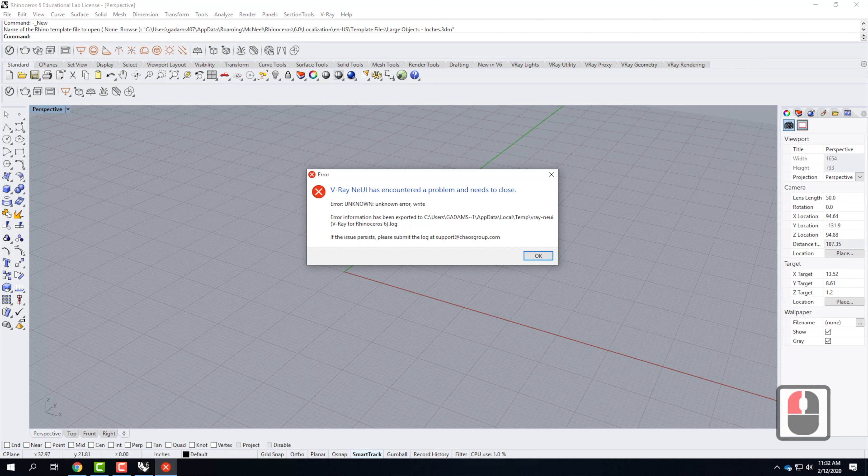Interesting. Well, it's a good thing we're not using V-Ray today. By the way, the computers have been acting up all day. So if your computer acts up, I apologize, but that's the way it's been.

So I am in inches, so we can go ahead and start working. And what I'm going to start with is drawing the shape that you see in part 1, step 1 right here, which is essentially a 2-inch radius curve, a 13-inch straight section, and another 2-inch radius curve. And so as I start to draw that, I'll go ahead and start with the curve tool. And this is one of those things where we have a lot of flexibility in terms of how we create this. I'm just going to start with the basic arc, center, start, and end.

And when I do that, the center of the arc, I'm going to go ahead and move it over 2 inches. So the center in coordinates, if I was starting right here at the origin, would be 2, 0. I didn't put an @ sign in it, just 2, 0. That would get me started. And then the origin here would be 0, 0. That would be the start of my arc. And the end of my arc, I just need it to be 90 degrees. So I can go ahead and turn on my ortho here.

And it's going to be right there. And so that creates that first little bit of the arc. You could create it in a different way. You could create the line first and then work from the line. I mean, there's lots of flexibility here in terms of how you actually create it.

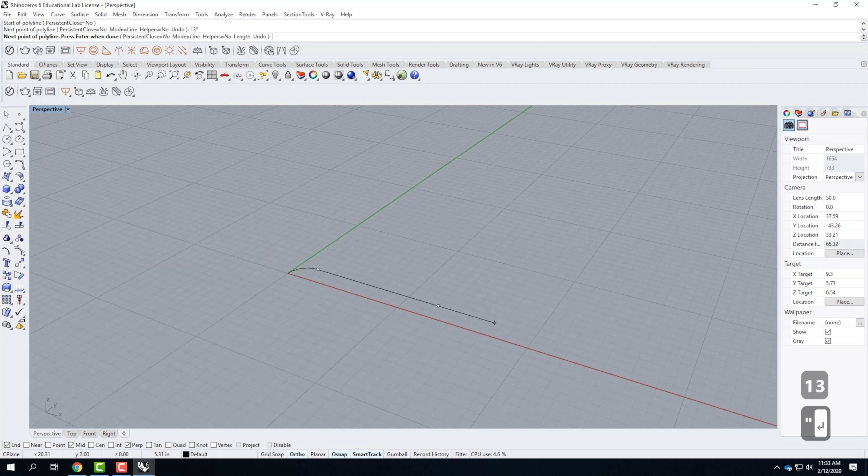Next thing I need is a polyline. And I'll start by snapping to this endpoint. Currently my snaps are not on, so I'll go ahead and turn on my end, mid, and perpendicular snaps. Those are the 3 that I like to have on as I work. And I'll snap right to that corner, and I'll draw over by 13 inches. So it's just the length here. There's my 13 inches, and I can go ahead and finish by pressing enter again.

Now I need this arc over here. I could do the same thing. I could mirror this arc, but I could also just create the arc again. So there's the start and the center. So in this, I would want to come down 2 inches to get that center. We'll start right there, and we'll end right there. And that gives me that piece of the arc as well. So I have this piece, and this piece.

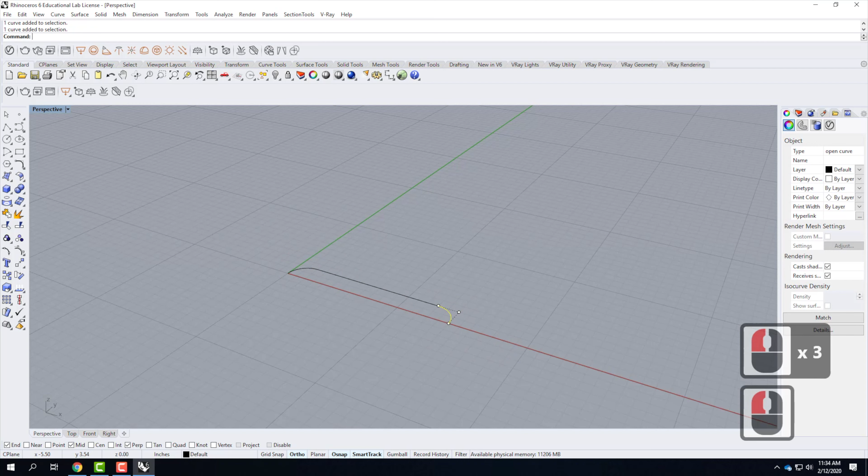I'd like all of those to become one continuous curve, and I'll do that by selecting them, and then going up to Edit, and then Join. So that makes them one continuous curve, and of course the middle here disappeared because of that error in Rhino that I haven't changed yet. So let me go to Tools, and then Options, scroll all the way down to View, expand that, click on OpenGL, and uncheck that GPU tessellation option. And there we go. Now I can see my object.

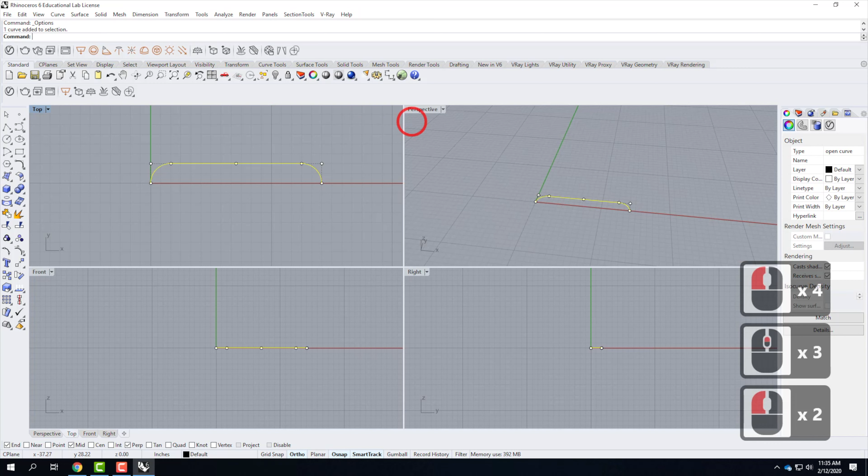Okay, so I have a continuous line that starts with this arc, goes straight, and then comes back here. But I'd like it to be standing up in the third dimension. So it's currently flat on the ground. I drew it flat. You could confirm that by looking at it in the top view. Yep, there it is. So I want it to be three-dimensional. I want it to be standing up. So I'll use my rotate 3D command. We've done this before. I'll go up to my transform. I'll choose rotate 3D. Alternatively, I could type rotate 3D into the command line.

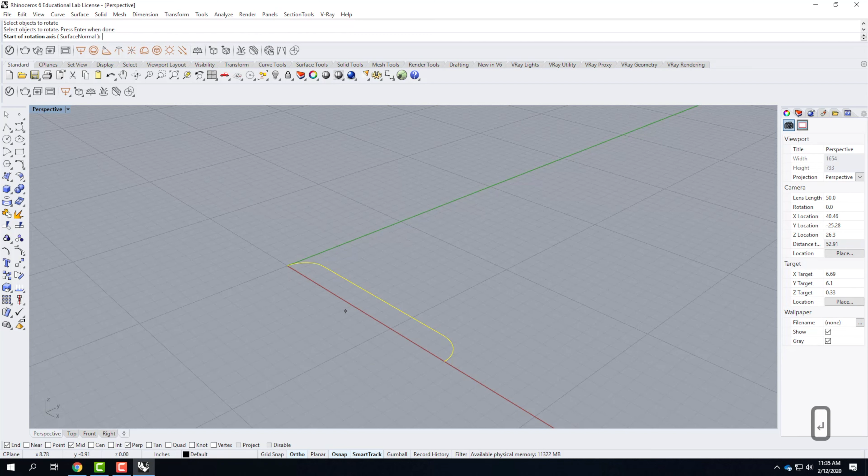I'll choose my curve and press enter. And then the start of the rotation axis, that is this axis right here, because I want these 2 points to be down on the ground. So I'll snap to this first point, snap to the second point. That's my rotation axis. My reference is going to be going up the y-axis here. And then I'm just going to fold it up till it's standing at perfect 90 degrees.

Remember, if I didn't have ortho turned on, I could hold down Shift on the keyboard and get it to line up perfectly vertical, like that. So all I've done is I've taken that curve that I drew, and I've now made it so that it's standing up, like that.

So the next piece of this is to go ahead and draw a circle that is right here where we start. So I'm going to come over to my tools here, and I'm going to choose circle. Now in this option, it's asking for the center of the circle, so I would pick the center of the circle there. The next thing here is that it's asking me for the radius of the circle. Well, the little picture that's hard to read here shows a diameter of 0.5. So a diameter of a ½ inch, which would mean the radius is 0.25. So I'd type in 0.25 and press enter, and that would give me a circle with a diameter of a ½ inch or a radius of a ¼ inch.

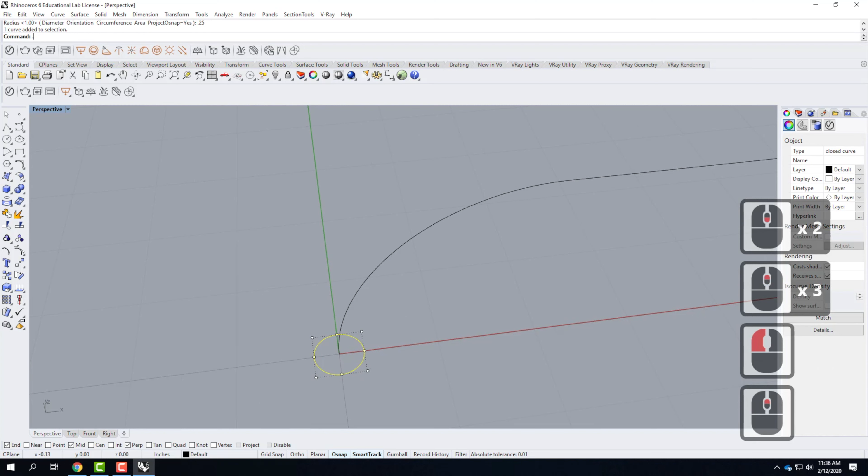Alternatively, when you're creating that circle, you could switch to diameter mode and type in 0.5, since you know that it's the diameter of 0.5. So pay attention on this exercise as to whether I'm telling you what the diameter is or what the radius is, so that these little pieces aren't too big.

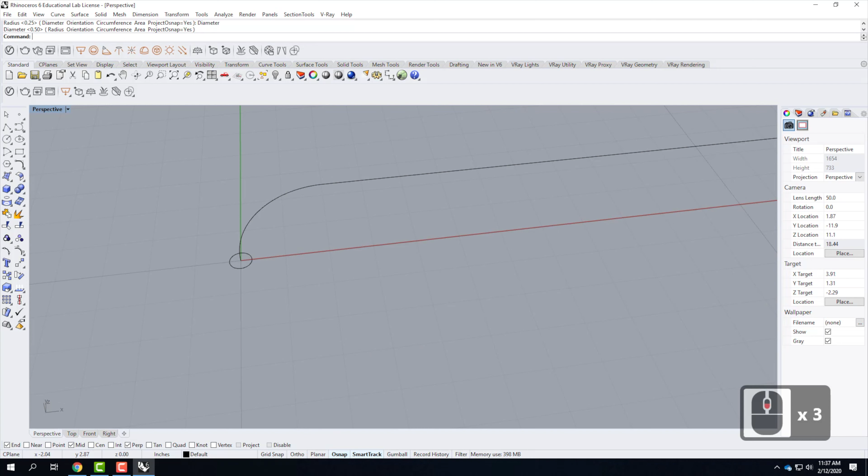Okay, so what I have now is I have something that's a curve, and I have something that defines the cross-section of an ultimate shape. So I'm going to use a command called a sweep. And what a sweep does is it takes a curve, so in this case, this curve here, and it calls that a rail. You could think of it like a railroad track. You have a train running on a railroad track, and there's a rail on one side. That train's going to stay on the track, and it's just going to keep following it. So what we're doing here is we're saying, I want this curve to follow this rail and give me a surface as it follows along.

So it's kind of like the Follow Me tool in SketchUp, if you've worked with that before, though it works a whole lot better. So what I'm going to do is go up to my Surface menu and choose Sweep 1 Rail. Alternatively, I could type in Sweep1, and the first thing it asks me is to select the rail.

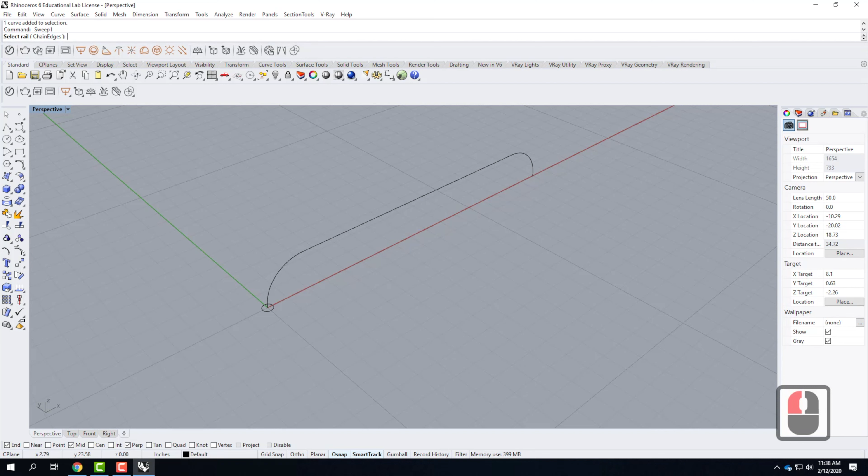So the rail in this case is this curve right here. I don't have to press Enter because I'm only selecting one curve. Then it asks me to select the cross-section curve. So the cross-section curve would be this curve right here, that little circle. When I'm done, I'll go ahead and press Enter.

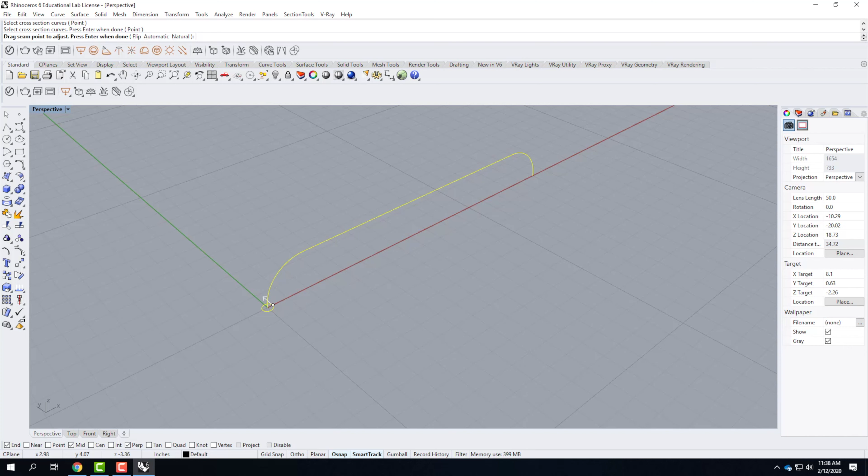It asks me, do I want to drag the seam to adjust? This is just where the seam of the surface would be. The default is almost always just fine, so we're going to leave it right where it is and press Enter. This then brings up the Sweep 1 Rail Options dialog box.

By default, the frame style is called Freeform. I'll explain the difference of these a little bit better when I do some other examples. But essentially that means as this curve happens, follow along with the curve with that cross-section, and make it look kind of like a pipe. So we'll stick with that. I'll explain Roadlike in a little bit. The rest of the options are just fine, and we'll say OK.

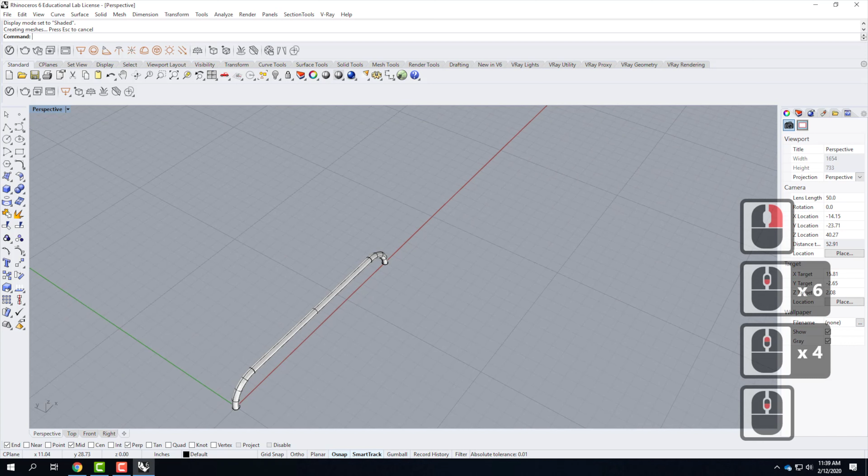And what I end up with, if I switch to shaded mode, is essentially a tube that follows along that rail that defines what this little tube should look like. So that was a very controlled example. Alternate to that, oops, sorry about that, wrong view. Turn back into perspective here.

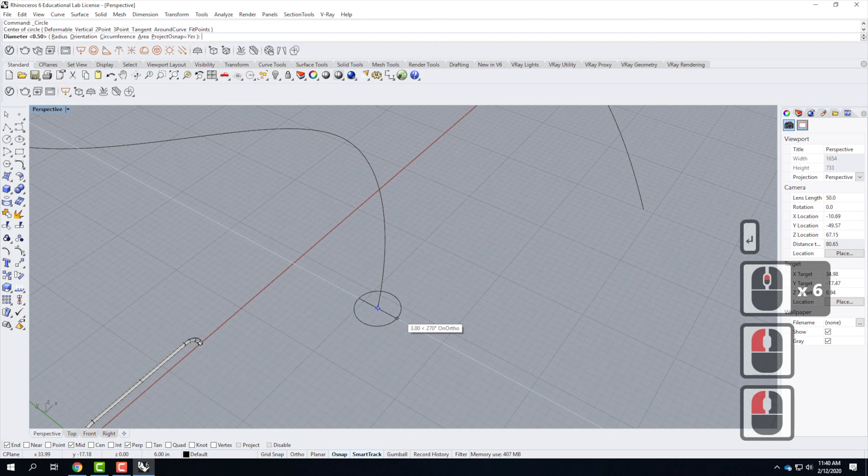I could make any curve that I wanted, like this, and I could start with a cross-sectional curve, like that. I'm going to make this a little bit bigger so it's easier to see. Now in this context, the cross-sectional curve is flat compared to this curve, so I need to rotate that up. One of them has to rotate up, so I'll just take the cross-sectional curve and go to Transform, Rotate 3D.

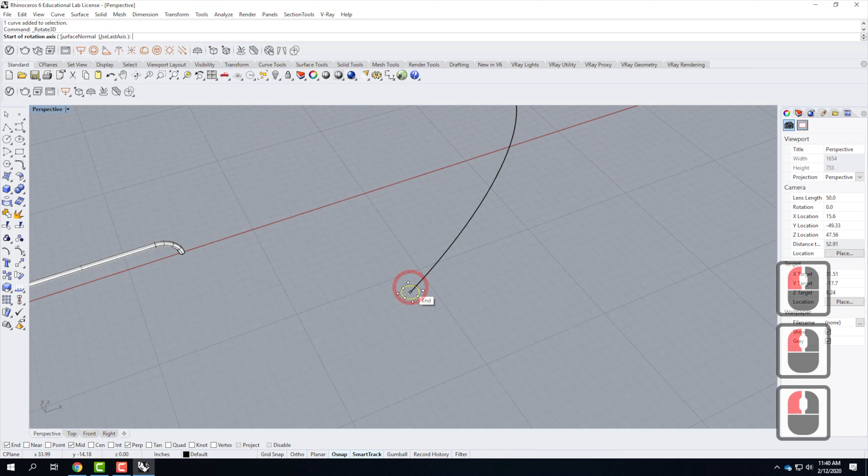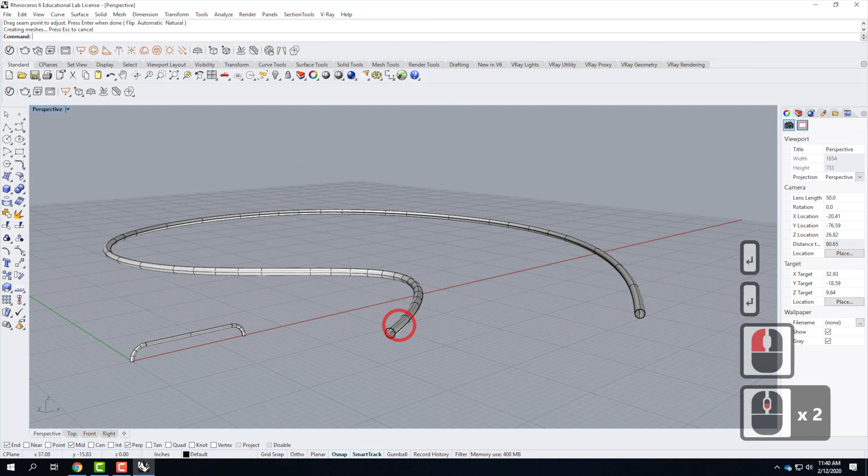All right, so now that's standing up. If I go back to Surface, Sweep 1 Rail, I can choose my rail, then my cross-sectional curve, and press Enter. There's the seam. And then it will build that in whatever shape I want. So that's flat still.

If I take this curve and manipulate some of these control points, let me move them vertically. We'll pull those up, and maybe pull these two up a little bit too. Okay, so now that same curve is going up and down in space. I can do the same sweep: Surface, Sweep 1 Rail, rail, cross-sectional curve, Enter, Enter, and now it's created a three-dimensional little pipe there. Does that make sense so far?

Okay, so what about if my cross-sectional curve isn't a pipe anymore? Let's say instead of a pipe, I want something that's a rectangle. So let me do a rectangle. Again, I'm exaggerating some of this so you can see it. Let me delete that. I need to do some rotations on this one to get it to fall right. Let me Rotate 3D.

In this context, I'm going to fold it down so it's below where we're starting here. I'm also going to rotate this a little bit with a regular rotation. So let me go to Transform, then Regular Rotate. I'm just going to pull that over, so it's a little more perpendicular to where I start.

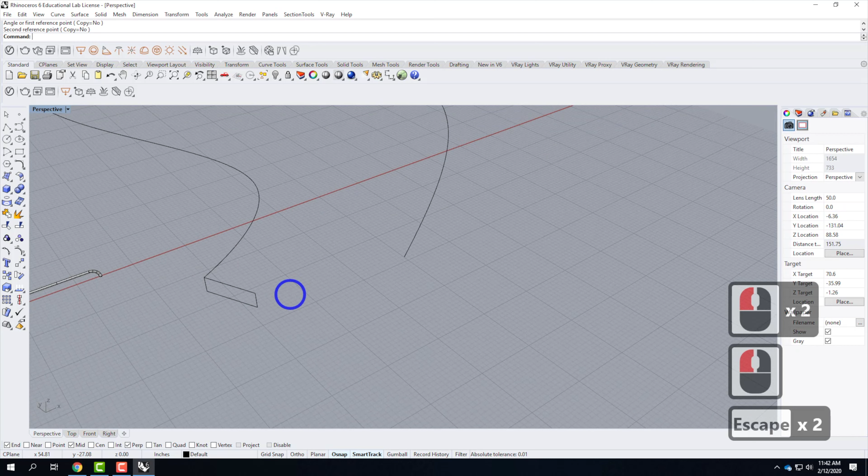Now I can do the same thing. I can do my Sweep 1 Rail. So I'll go up to Surface, Sweep 1 Rail. There's my rail, there's my cross-sectional curve. When I press Enter, we're going to start to see some differences.

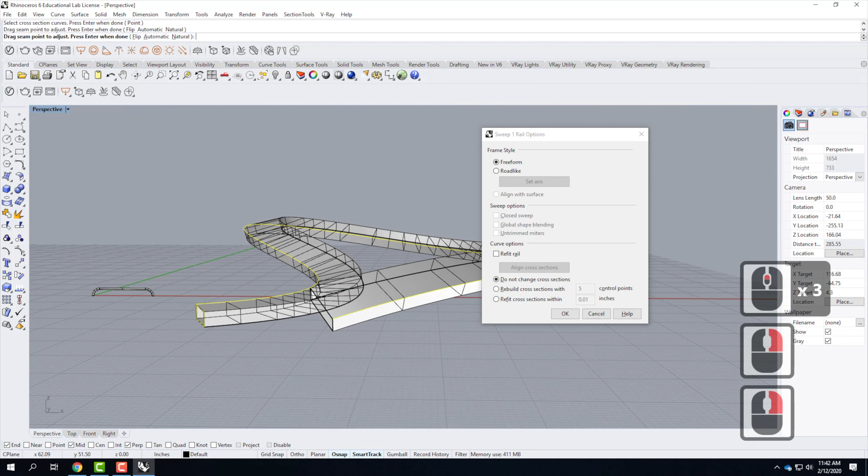Right here, my frame style is set as freeform. So if you look at this, as it starts to come up, you see how it kind of arcs around the curve, and then it arcs back, and then it ends up right here, such that my ending point is on an angle where this is flat.

If I switch to road-like, it's going to keep this like a path, where the top is always going to be flat. So instead of being able to twist and bank, it's going to keep that a stationary surface as it goes up and down, which may or may not be what you want from a modeling standpoint. But the point is that there's a distinct difference each time with how you do it.

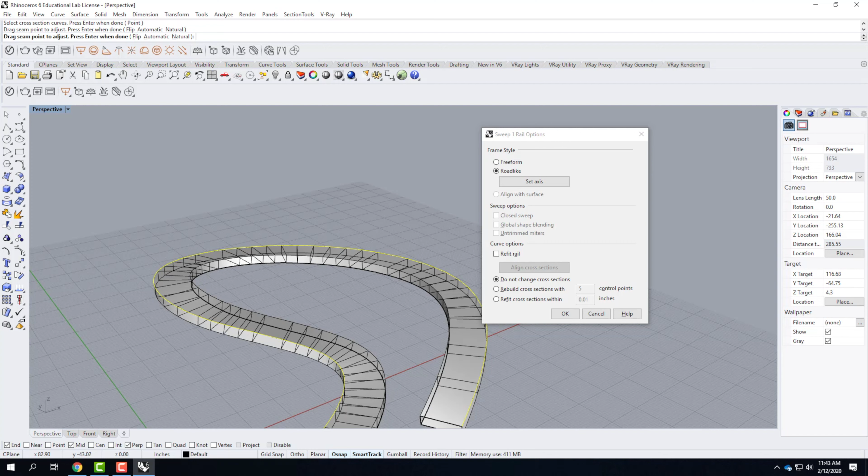So we'll say that road-like top is OK. I'll go ahead and say OK, and there is my resulting surface, kind of like a path or something that's going around a particular object. So that's when I switch to road-like top versus freeform.

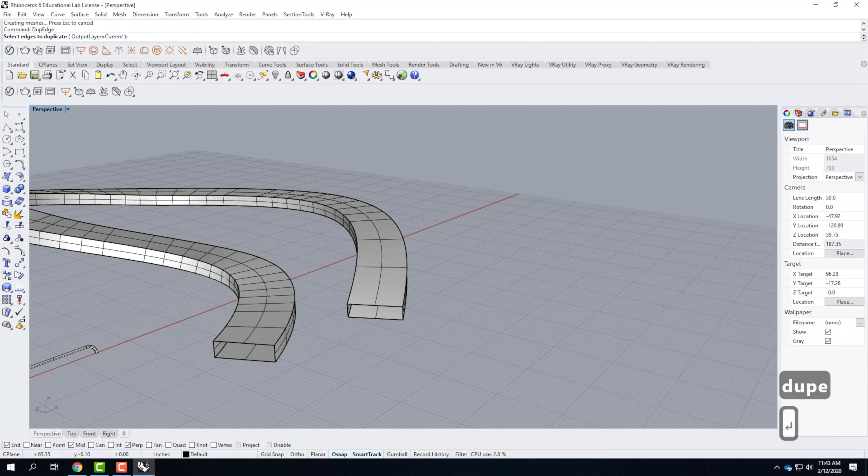Now for the other option, I'm going to duplicate an edge. So I'm going to type dupe edge, and I'm going to duplicate this edge right there. Let me get rid of the original surface. Now I have both edges of that sweep, so there's technically two rails now.

But I'm going to modify this one a bit. Or maybe actually I'm going to modify this one because it has fewer control points, it makes life a little bit easier. So let me take this, and I'm going to make this a little bit bigger by moving these 2 points out, like that. And you know what, maybe I'll move these 2 points out a little bit too. Or, for argument's sake, I'll move them closer. So I've manipulated those rails.

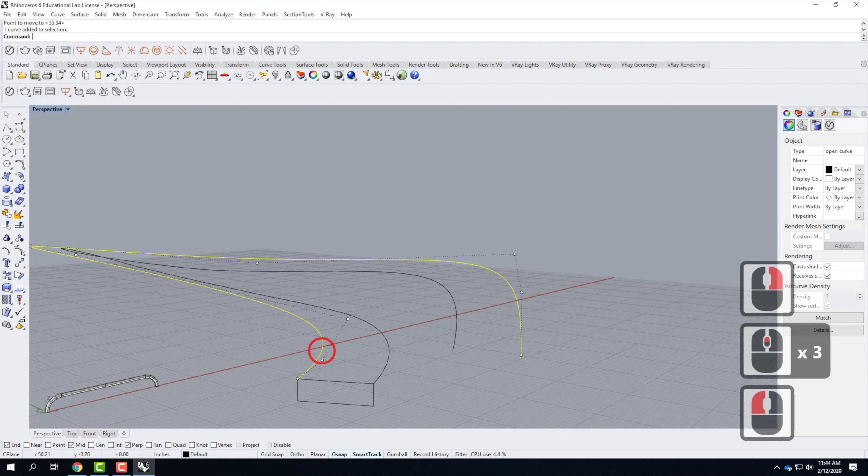They're no longer parallel. We've previously done a Sweep 1 Rail, where this rail has defined, with this cross-section, the end result. I can switch from a Sweep 1 to a Sweep 2 by going into Surface, Sweep 2 Rails this time. So the first rail would be this one, the second rail would be that one. This is a little bit more like a railroad track, where I have a rail on each side.

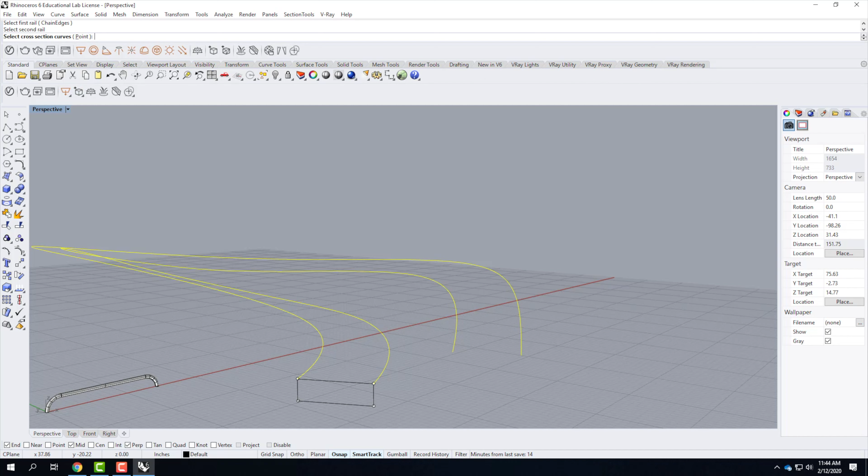When I go ahead and select the cross-sectional curve right there and press enter, there's my seam, I'll press enter, the cross-section is going to get larger as I get to the curves where they're further apart. So you see how that cross-section gets larger? It also gets kind of really funky in this section because they're getting closer together and not getting small enough.

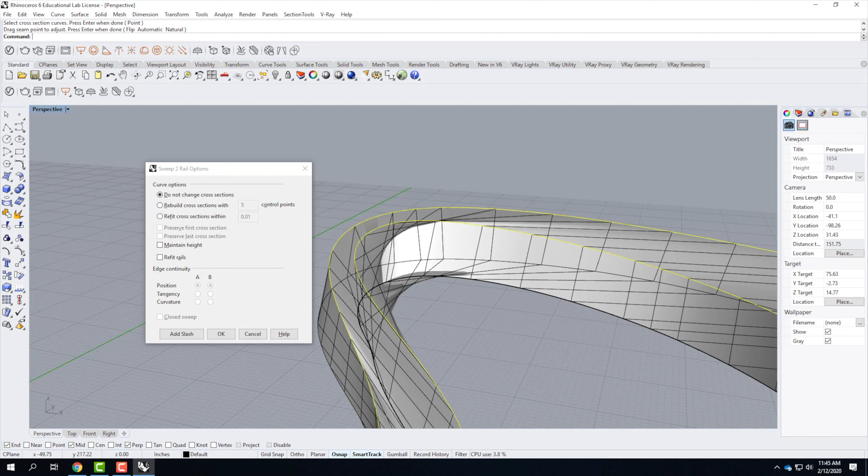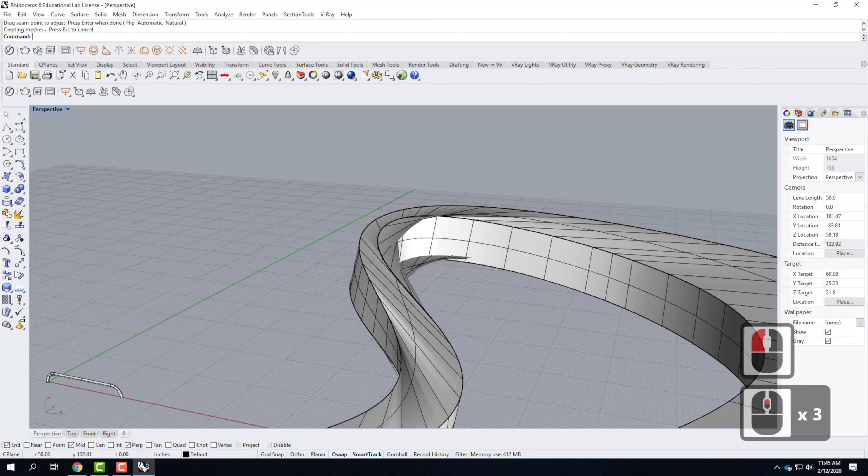We have a couple other options here. We can try to rebuild the cross sections, that's smoothing them out a little bit. Refitting isn't going to help us too much, but you guys get the idea here. So in this case, I'm not sure this ended up working out to turn out that well. I probably needed to make this bigger rather than smaller to get a good result out of it. But I like to show you what the sweep 2 rails does versus the sweep 1 rail.

The one last thing I'm going to point out, let me go ahead and delete this, I'll delete the inner one. That is that the cross-sectional curve does not have to be centered on or touching the rail itself. I could take this cross-sectional curve and move it so that it's not even close to where that rail would be, so it's floating out here in space. And I could do the same with sweep 1.

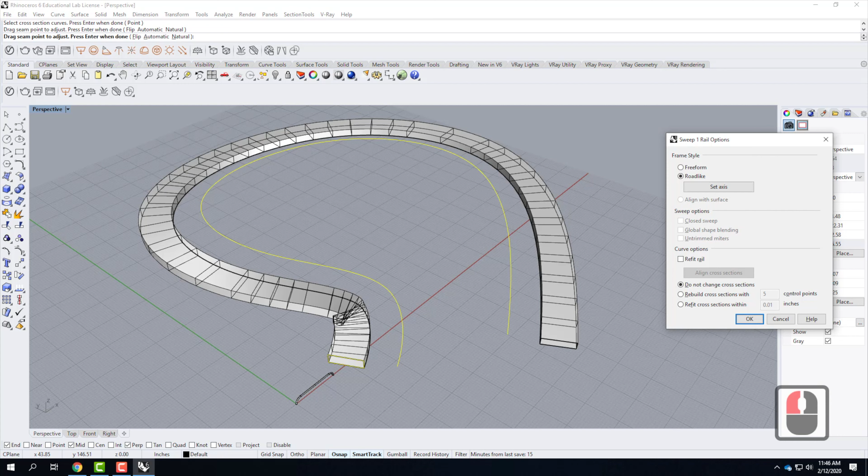There's my rail, there's my cross-sectional curve, enter, enter, and it's going to build it, maintaining the distance between this rail and my cross-sectional curve. So it's important to note that the relationship of the two doesn't have to be in the same plane or attached to one another. I think sometimes visually it makes sense to have it like it's at the center of this object or at the side of this object, but it doesn't have to be. That's something important to keep in mind as we work through our sweeps.

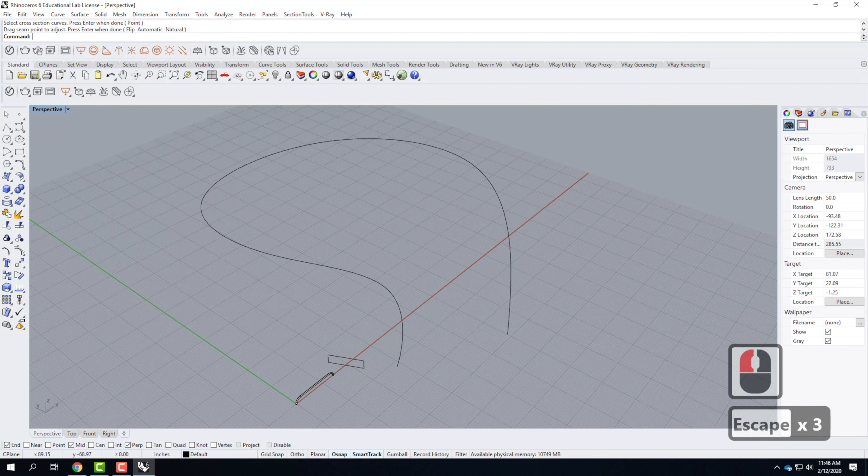So I'm going to go ahead and delete those objects because they have nothing to do with what I was building, but I think it helps illustrate what a sweep is and how we work with a sweep. So there's my original object. I'm going to press Z for zoom, followed by S for selected, to recenter my view around that particular object.

And then I need to keep building. So at this point, I'm going to create a little button that goes on the end. That's kind of the clamp that holds the glass. If we jump back to my images here, you can see there's these little discs that hold the glass. We're building those little discs right now.

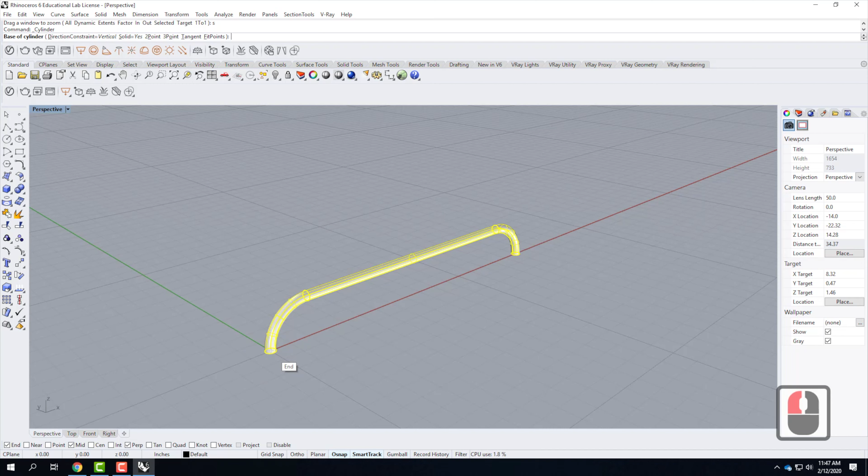So instead, I could extrude a curve, but I can also go into my standard shapes and choose a cylinder, because essentially that's what it is. I'll pick cylinder. It's going to ask me for the base of the cylinder, and I'm going to pick the very center of this object right there. Then it's going to ask me for a radius. In here I have the diameter set at 1.5 inches, so the radius would be 3/4 of an inch. Or I can click on diameter and choose 1.5.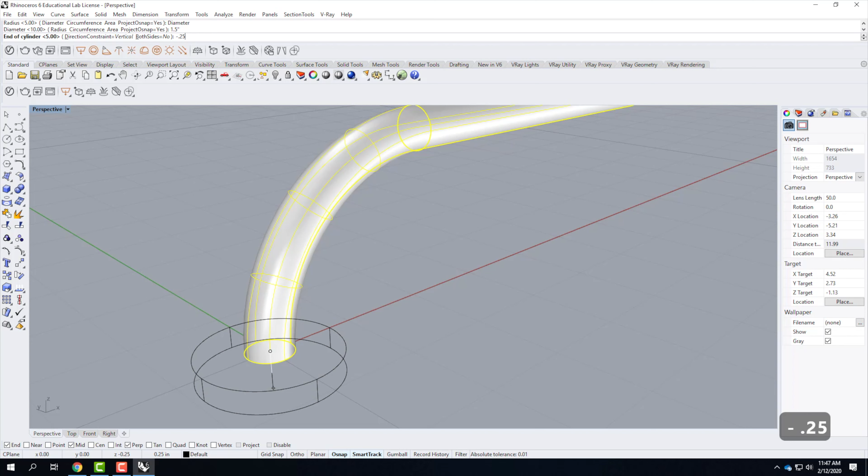Next thing I need to do is choose whether it is going down or going up. In this case it's going down, so I'll do negative 0.25, so it's negative 1/4 of an inch going down. And that creates this little button.

I can do the same thing on the other end, or I could just mirror this to the other side, but for the repetition of it I'll do it again. I'm going to choose to create another cylinder. I'm going to snap this end point, I hope. In this case it doesn't like me, so I might have to turn it upside down so I can see it there. There we go.

I'm still in diameter mode at 1.5 inches. That's great. And I'm going to be going down negative 0.25 to create that part of the clamp as well. So I have this button and I have this button.

Now, the way these clamps work, there's actually a hole in the glass. So this piece of metal is on one side of the glass, then there's a hole in the glass, and the structure goes through, and then there's a clamp on the other side, and the two press together to hold the glass. So I need to create another one of these that's down even a little bit further.

So I'm going to go ahead and take this one, and I'm going to use the copy command. I'll go to transform and then copy, point to copy from, and then I also have the ability to copy vertical. So in this case, vertical is a good idea.

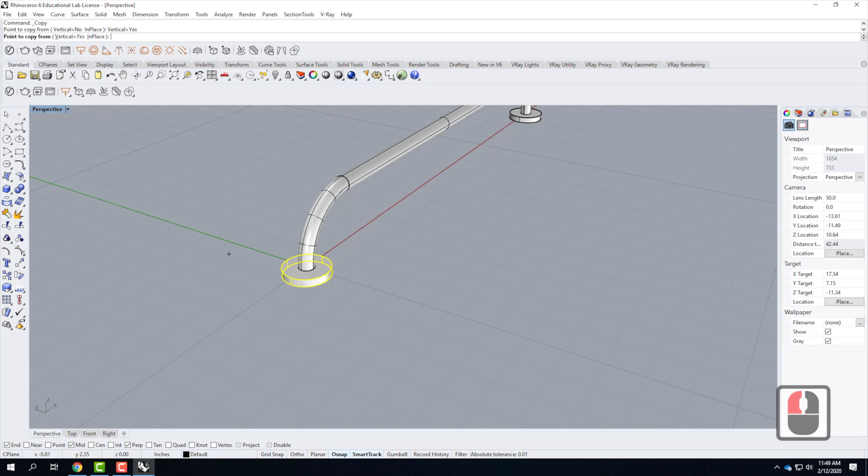So I'm going to go ahead and click on vertical, and then point to copy from. It doesn't really matter where we pick, I'll say right there. And then I can specify a distance. Now I need there to be 1/2 of an inch between these two, so a 1/2 inch plus the 1/4 inch thickness of this would be 3/4 of an inch. So I can type in 0.75 inches.

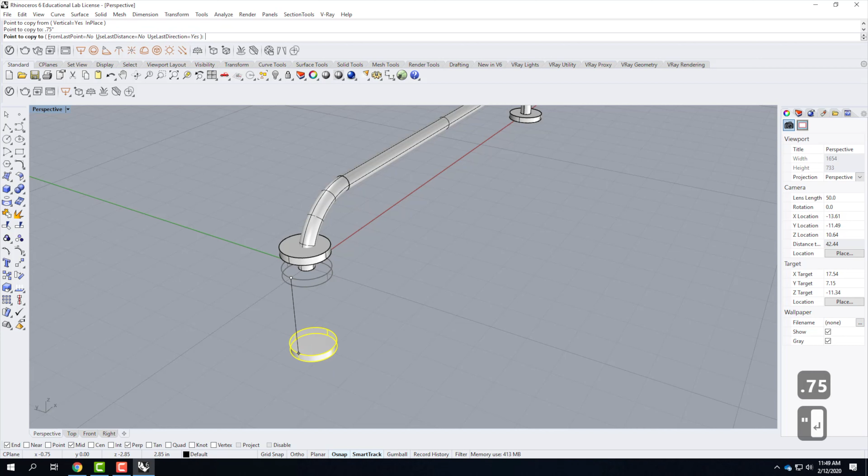Now when I do that, it's going to create that lower one. Oh, excuse me, I have to type in negative 0.75. My fault. There we go. Now it creates that. I'll press delete.

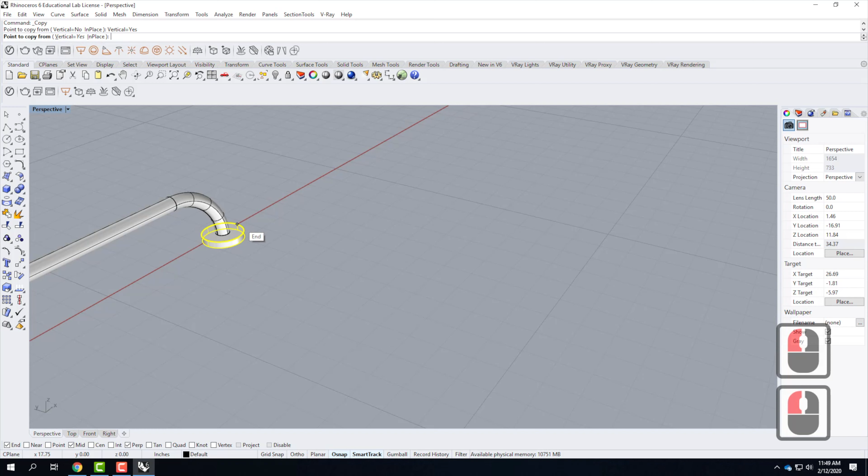So I'll do that one again. I'll take the cylinder here. I'm going to go to transform and then copy, point to copy from. Oh, I need to be vertical. We'll say right there. This needs to go down by 0.75 inches, so I need a negative 0.75 inches.

And that then creates the lower part of this. So you can see that I've created this tube, and then I've created these two clamps on either end to hold that panel of glass. Make sense so far? All right.

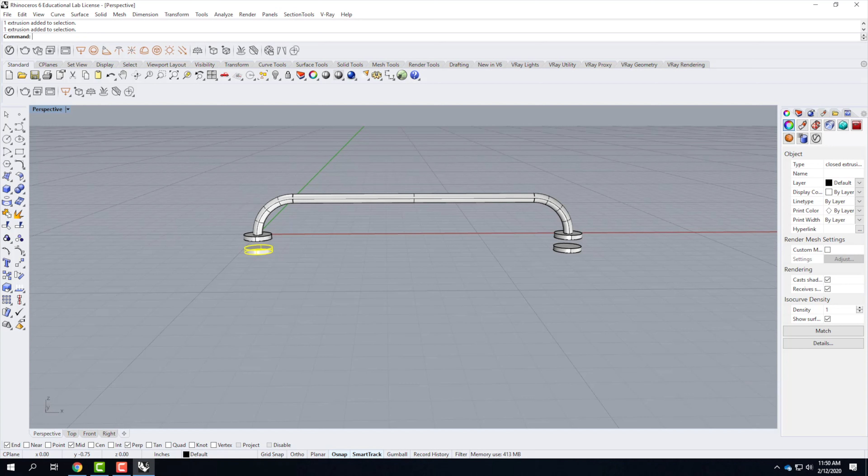So I have that. The next part, now that I've created this, is that I need one going in each direction. This one here, I'm going to ultimately rotate by 45 degrees. So I can use my regular rotate. I'll go up to transform and then rotate. It's not a 3D rotate, it's just a regular rotate.

I can start right at my center, so I could snap right to the center there, or I could also type in 0,0. This time, I'm going to start there, and I'm going to go up to 45 degrees. So this is a good opportunity to actually type in 45, since I want to rotate by exactly 45 degrees. And now that one is rotated like that.

I need a second copy of this so that I can have one going the opposite direction, going this way. So when I create that one, I have two different ways of doing it, and I'm going to show you both methods here.

The first way would be to select my object. I'll go ahead and copy it, so I'll go to transform and copy, and I'll pull it over here and make a second copy. So there it is. Then I'll take this copy and I will rotate it.

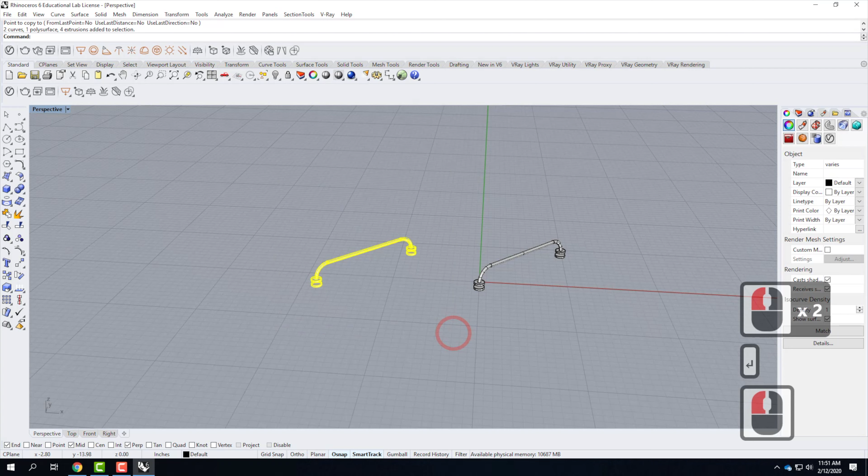So I'll go to transform and then rotate, and I'll rotate it right around the middle. In this case, we're going this direction. I need to rotate it by 180 - or no, by 90, sorry. So I could just type in 90, and that would give me that shape.

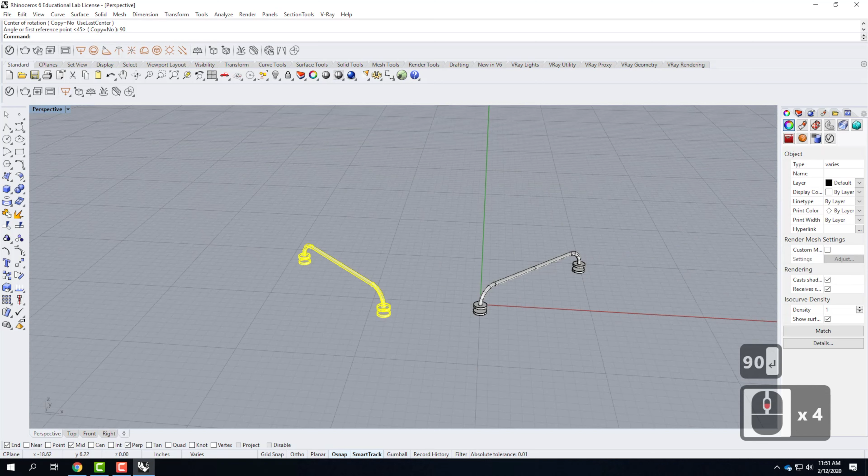And then I can move it again from the center, or the midpoint, so that it matches up with the midpoint over here. Now I'm having trouble snapping to this midpoint because I don't see the curve in here. So this is one where switching your view can be helpful.

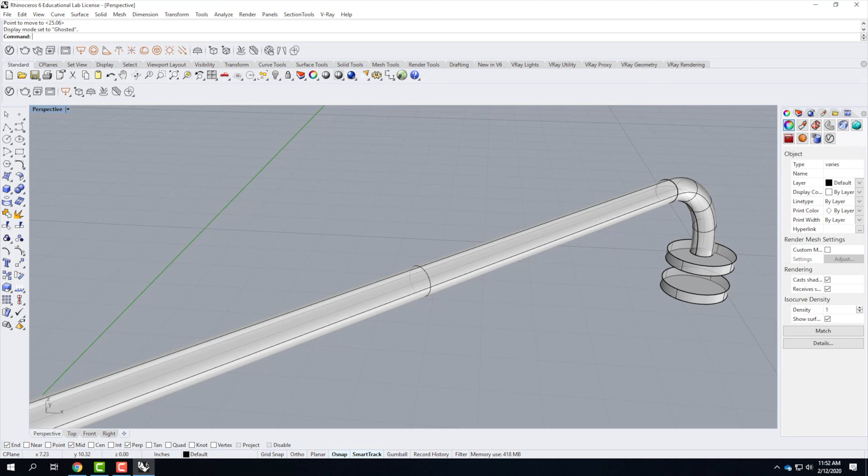So we've been working primarily in shaded mode so far. But if instead of working in shaded mode, we work in a mode called ghosted, it's almost shaded mode, but we can see the curve through our objects a little bit, so our objects have a little bit of ghosting to them. That will allow us to pretty easily move from this middle and snap to that middle.

And if I did this correctly, if I look at it from the top view, I should see a perfect little X there on a 1-foot square, which is exactly what I wanted to have happen.

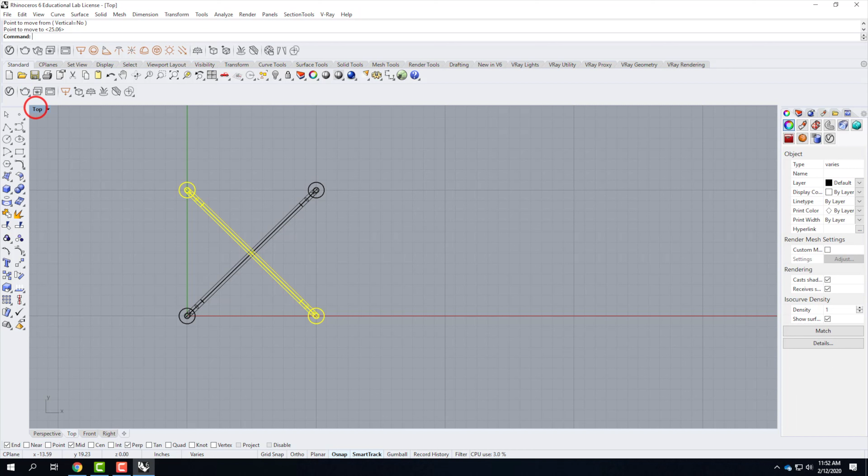So I told you there were two different ways of doing this. I'm going to go ahead and delete that piece, and I'm going to show you the other way. This has to do with how efficient you can become as you start to work in Rhino, and it doesn't mean that you have to do it this way. There's nothing wrong with making a copy, rotating, and then moving back.

But what I would do if I were modeling is I would take this shape, go up to copy - so I'd go to transform and then copy. As soon as I'm in the copy command, I can type I or select this in-place option. That means I don't need a base point, just make a copy right on top of itself. So I'll go ahead and click on that, and it makes a copy right on top of itself.

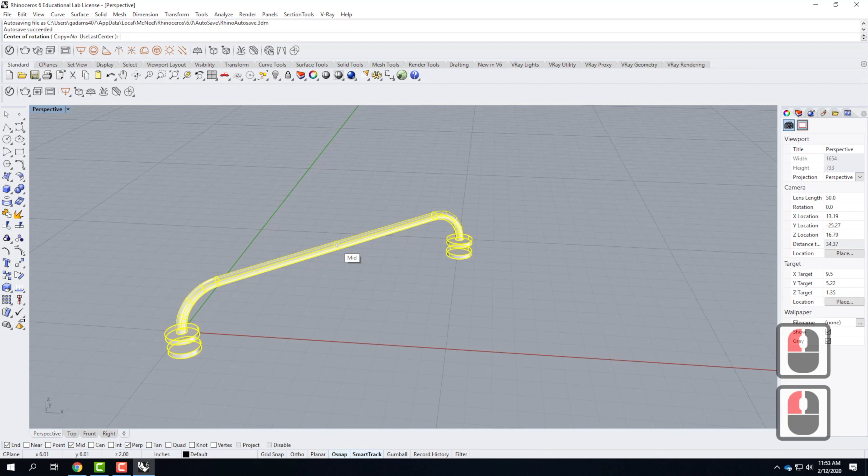Notice that the object maintains its selection, so I still have it selected. I can then immediately go into rotate, so I can go to transform and then rotate. I can snap to my midpoint, say 90, and do my rotation. So I've saved the step of copying over here, rotating, and moving back - I've made a copy in place and just rotated the copy. It's a more efficient way of working.

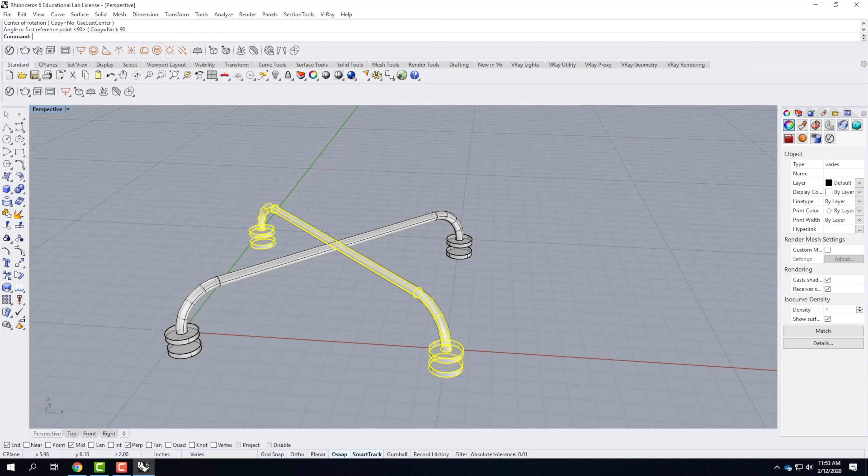It doesn't mean that it's the way you have to do it right now. I just like to introduce that as a concept for your modeling speed and technique. So at this point, I've made this little X that's going to hold our glass. I need to make the extension rod that comes up off the top of this.

And that extension rod, if we flip the page over - from the base, it's 2 feet to the center of the little cable. Alternatively, from the top of our little spider clamp thing here, it's 1 foot 9 1/4. So I'm going to go ahead and make it from the base, and then we'll trim it off afterward.

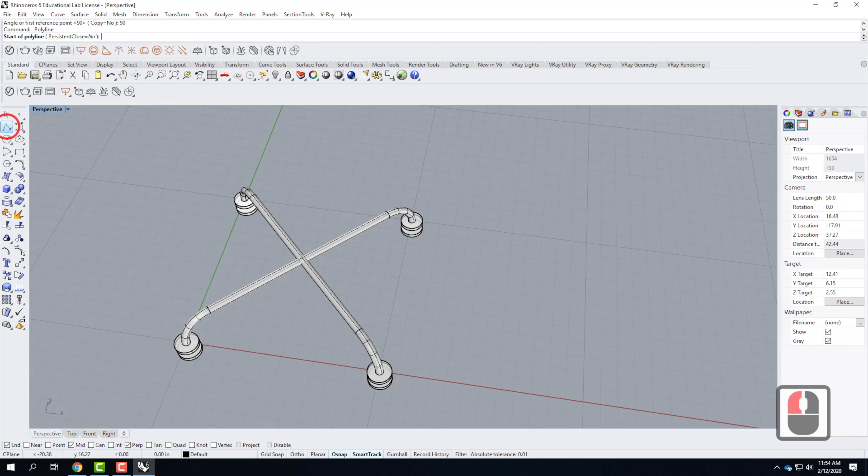And I'll do that by using the same commands that I've been doing. So the first one I'll choose is polyline, and I'm just going to make it flat on the ground here. I'll turn on ortho so that I'm straight, and I'll do this at 2 feet.

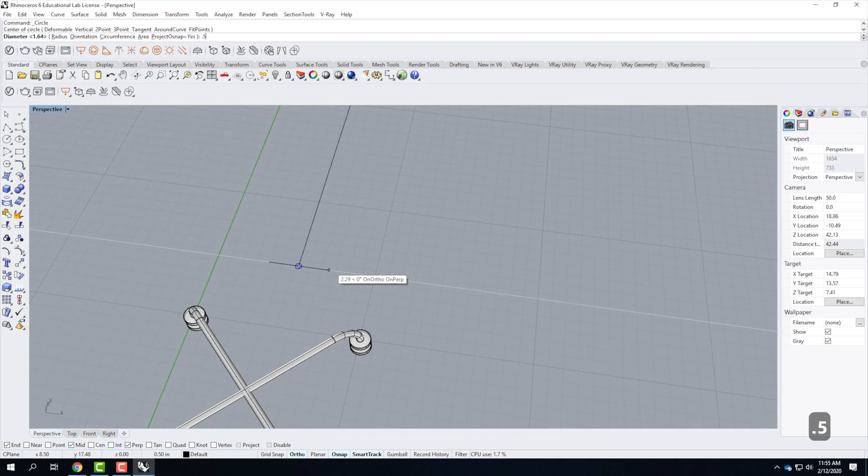There we go. And there's my polyline. Next thing I'll do is I'll create my cross-sectional curve. And in this case, it is also a 1/2 inch diameter steel rod. So my diameter, listed up there, would be 0.5. There it is. I need to rotate that shape three-dimensionally so that it stands up.

So I'd go to rotate 3D. Alternatively, I could rotate this line. Ultimately, the line's going to have to be rotated, so it might be more efficient to do it that way. I'll go to rotate 3D and stand this line up. So there's my axis of rotation, and we can stand that up so it's standing vertically. I could then do my sweep. So I'll go to surface, sweep one rail, rail, cross-sectional curve, enter, enter, and it creates, oh, one more enter, and it creates that shape.

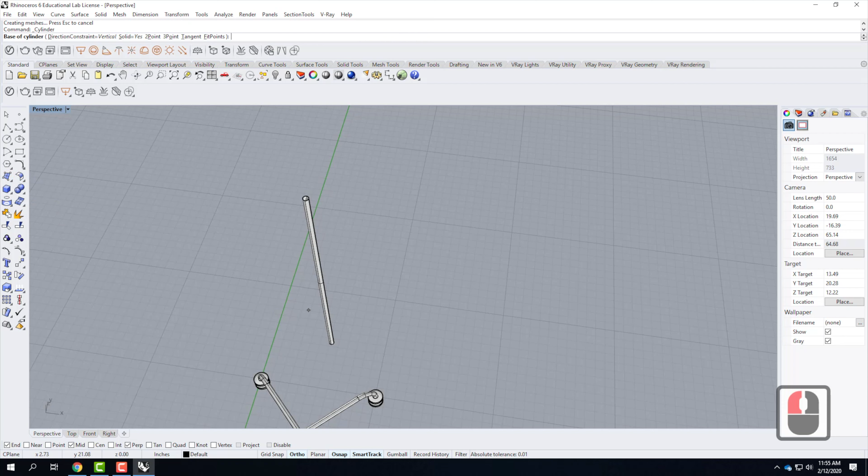Now the astute observer here would say, well, wait a minute, couldn't I also just go and create a cylinder right here with a diameter of 0.5 and a height of 2 feet? Absolutely. So this cylinder is exactly the same as this piece. The only difference is that this cylinder has a top and a bottom on it. We're going to get rid of the top and the bottom anyway, so it doesn't really matter.

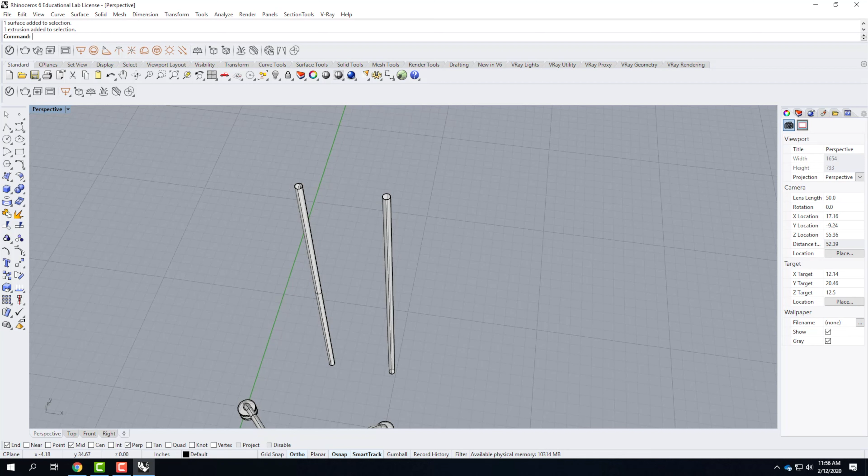So that's the thing about Rhino. There's always multiple ways of creating a particular object. I'd like to show you this, and of course today I'm emphasizing the sweeps, so I'm going to keep doing it via sweeps. But I want you to be aware that there are other options for how you would create this.

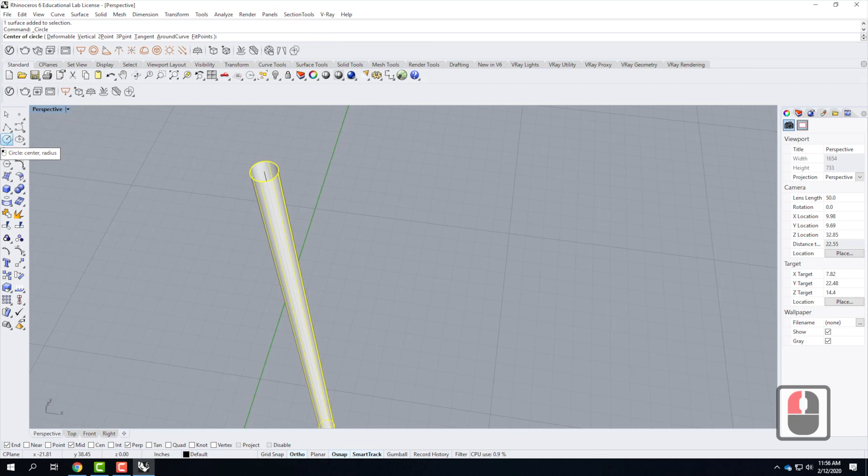So I now have this little riser here, and then I need a little donut on the end that's going to accept the cable into it. So I'm going to do that, and you can see that the outside diameter of that little donut is 1 3/4 inches. So this would be an opportunity to use my circle. Once again, so I'm creating a circle. I'll snap right here to the center, and I would set my diameter at 1.75 inches.

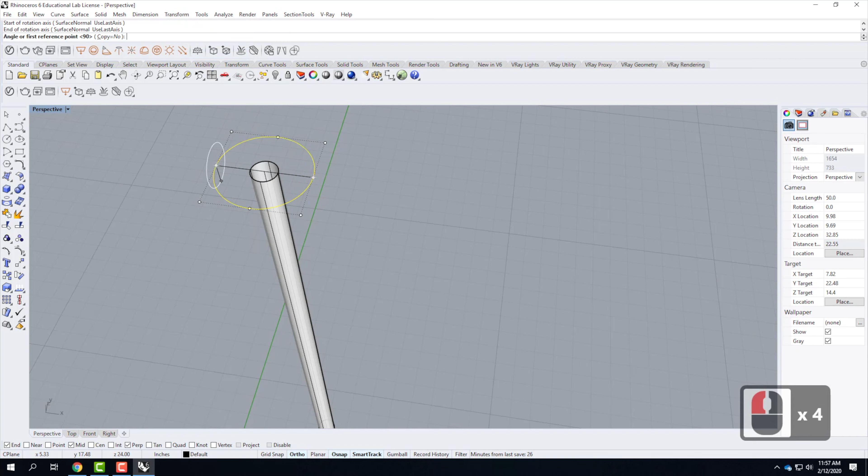Now, in this view, I would have to then rotate 3D, so I go to transform, rotate 3D, and we'd stand this up so it was standing up like that. But if I initiated the circle command in this perspective view and then switched my view into, say, the front view, I wouldn't have to do that rotation.

See how that changes? So I've changed the working view from perspective, where I started, down into this front view where I can just type in 1.75 inches, and I now have, without having to do the 3D rotate, the shape in the correct direction. Does that kind of make sense? So I'm using the viewports to help myself out. So that's the outer diameter.

The steel tension cable is only 3/8 of an inch. That would be the inside diameter. So I could do the same thing. Let me snap to this point, and I'll move into the front view here. And in the front view, my diameter needs to be 3/8 of an inch. So I could type 3/8, or I could type in 0.375 to get 3/8 of an inch. Press enter, and there's that center cable right there.

So if we look at it in perspective, we're seeing the center. We're seeing the outside diameter. Now we need one more circle that represents the cross-section of this little donut that we're creating. So if I come back to the circle tool, we've been using the circle center and the radius. But notice hidden underneath I have some other options, one of which is a circle with the diameter.

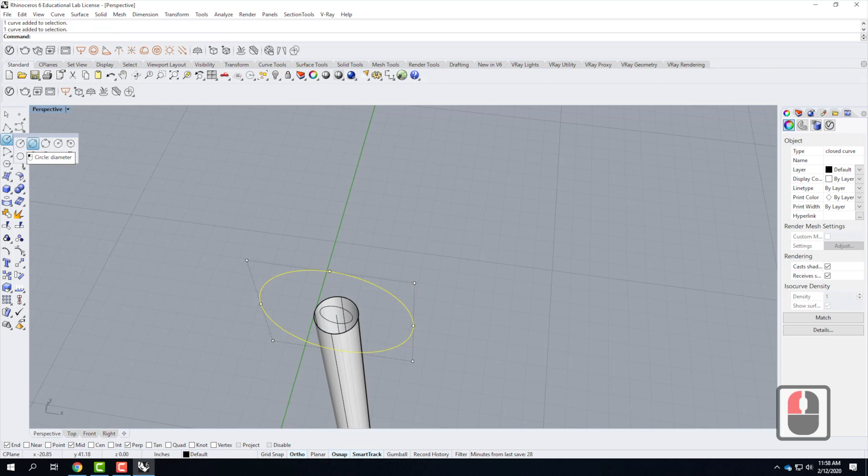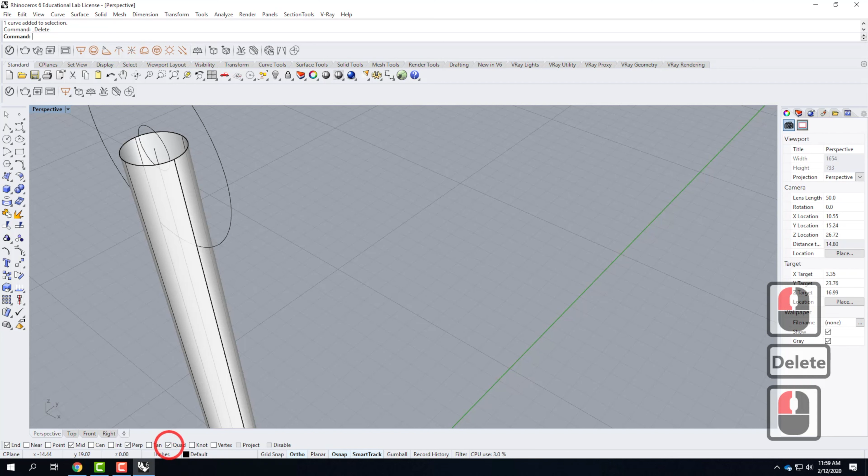If I pick that tool, I can actually snap from this edge over to that edge and create a circle that's perpendicular to those two curves. If you're having trouble snapping, you can also turn on the quadrant snap, which will snap to the north, south, east, and west points on a circle. So I could go from there. Oh, sorry, wrong tool. Let me click on this diameter circle and go from quadrant to quadrant like that.

So this is set up for a sweep. I can sweep using the outer rail, or I can sweep using the inner rail, either of which is perfectly fine. So I'm going to go ahead and go up to my sweep one rail. So I'll go to surface and then sweep one.

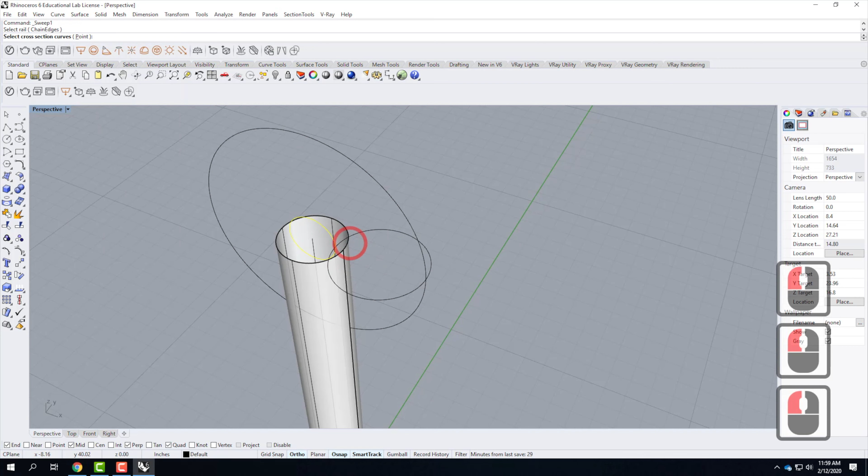There's my rail. There's my cross-sectional curve. I'll press Enter and one more Enter, and that gives me this little donut on the end. You do have in your shapes here a torus, which is essentially a donut. And so we could do the same thing using the torus tool if we wanted to. Interestingly enough, the sweep makes more intuitive sense to me. Like, that's how I would build it. But that's, again, just a preference.

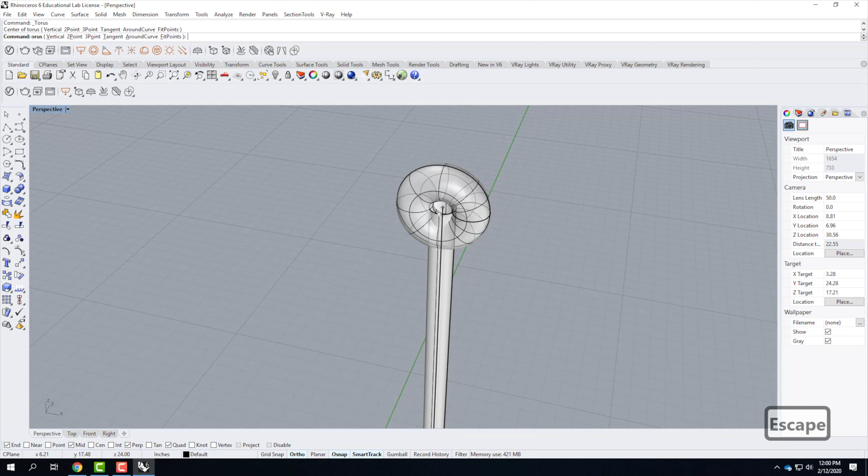Okay, so if I start to look at this, though, my steel rod that's coming up here intersects this torus, or this donut, at kind of a funky place. And we can see artifacts kind of poking through on the sides. So we need to do some trimming to clean it up. So I'm going to go up to Edit and then Trim. My cutting object is going to be the donut, or the torus. I'll press Enter. And then I can get rid of wherever this rod kind of pokes out.

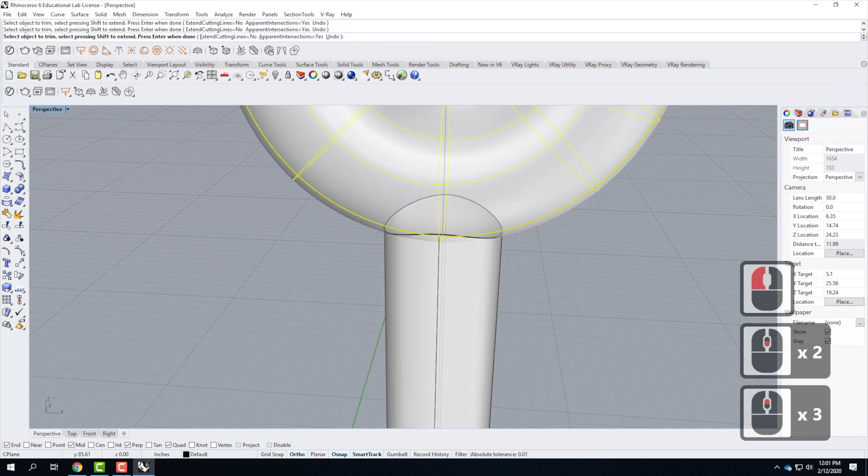So it pokes out there. That would be clean and through. But I could also take it a step further and get rid of that piece so that I end up with just where the two intersect down here at the bottom. That's a nice clean way of doing it. Go ahead and press Enter to finish, and there it is. I could also use this object as a trim and get rid of the tiny little bit there such that those made a perfect seam. That's really unnecessary because you're not going to worry about it from a rendering standpoint, but I'm pointing it out anyway.

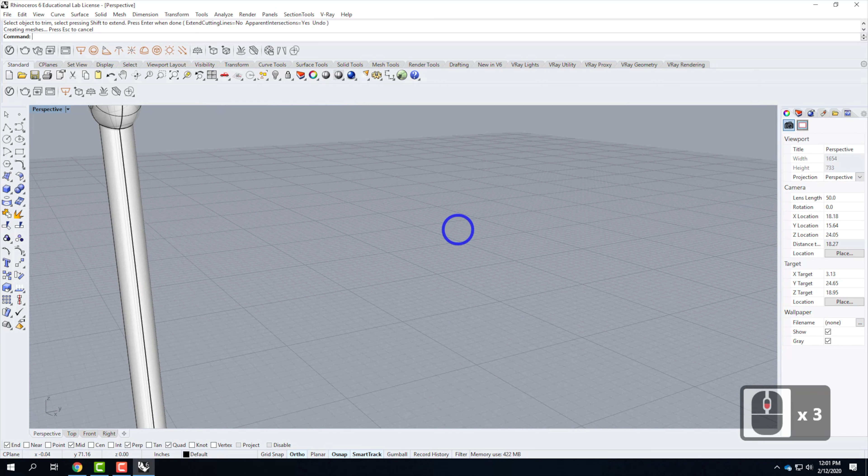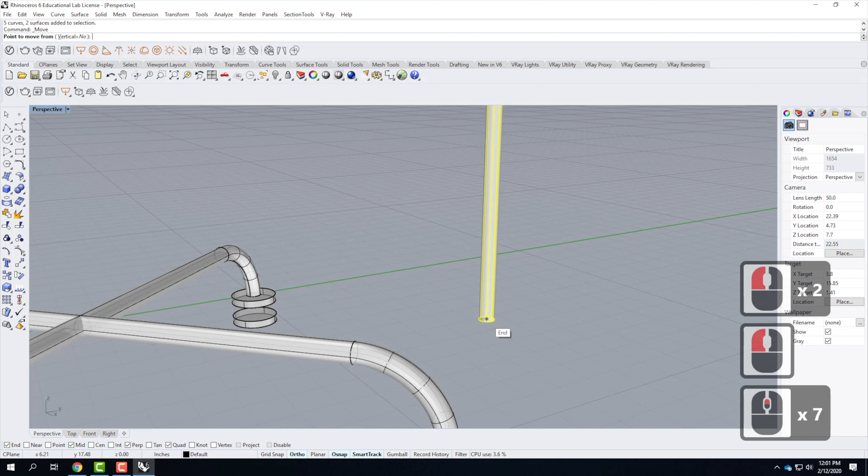So the next part of this is that this object, this one that I just created, needs to line up with this object right here. So if I were to take this object and move it, let me go to Transform and then Move, I could snap from this right to the center of that. Now this is too tall because it's 2 feet from the bottom up to the top, or from where the glass would be. So I actually need to move this down, and I happen to know how far down it is because I drew these curves to begin with.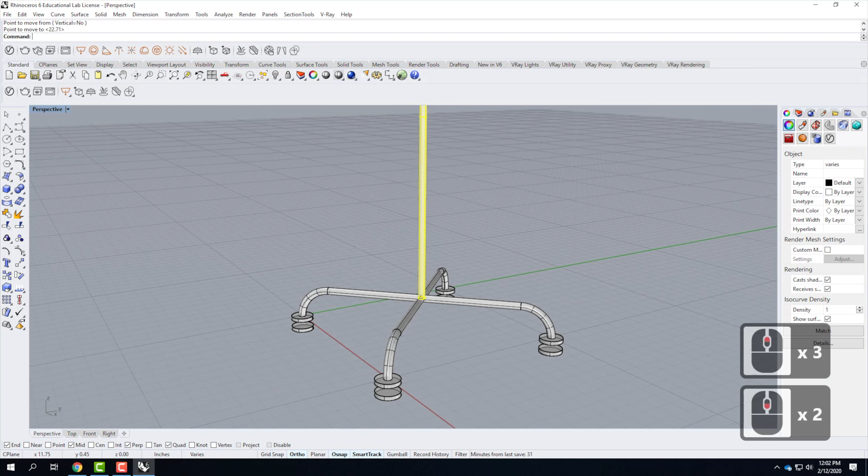It's 2 inches. The alternative would be that you could move it and then use your side view as a reference point to get it to come down to where it would match those. So in that context, I would go ahead and start the move, vertical, and we could say I want to move from that point right there. But then I could come in here and reference. See how I can reference one of these points? So I could reference right there on the spider and actually have that snap as it's coming down. So I'm using this view to help guide my placement. So there it is, placed.

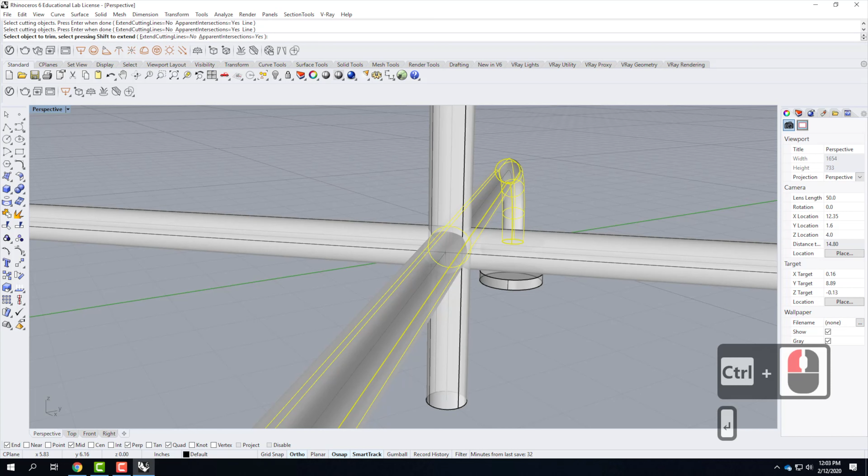But again, I have this object fully intersecting with these two objects. So I need to do some cleanup. So I'm going to go ahead and go to Trim. I'm going to select this curve or this curve. I actually think it's easier to do it one at a time, so I'm going to do just this curve. I'll press Enter, and then I can trim off that lower part right there. And when I do that, it trims all the way up. You can kind of see where it intersects there, like that. I could reach in here a little bit more and try to get rid of more of that. See where the holdover part is.

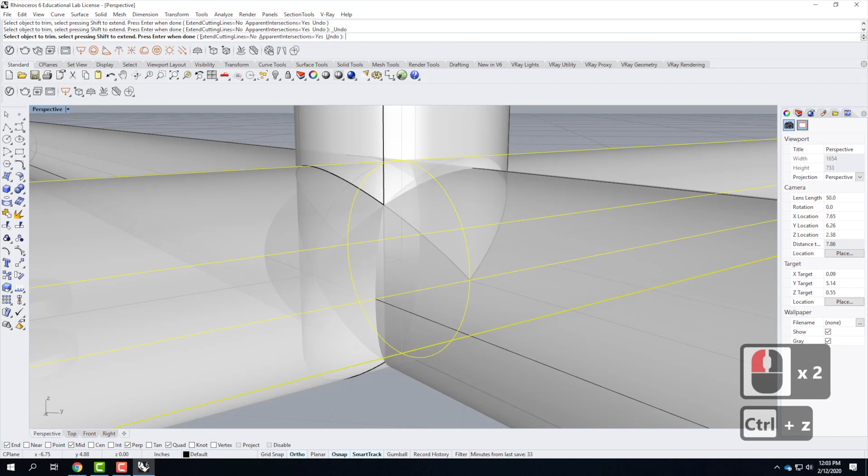There's a little bit there, that's a little bit there. Whoops, too far, undo. Right, so in that context, I need to trim it a little bit more. Let me illustrate this for just a second. If I hide this, you can see where the intersection has happened with just those two objects. And actually, there's a little bit on this back side that I should get rid of. So let me type trim, and I could get rid of that part of the object there.

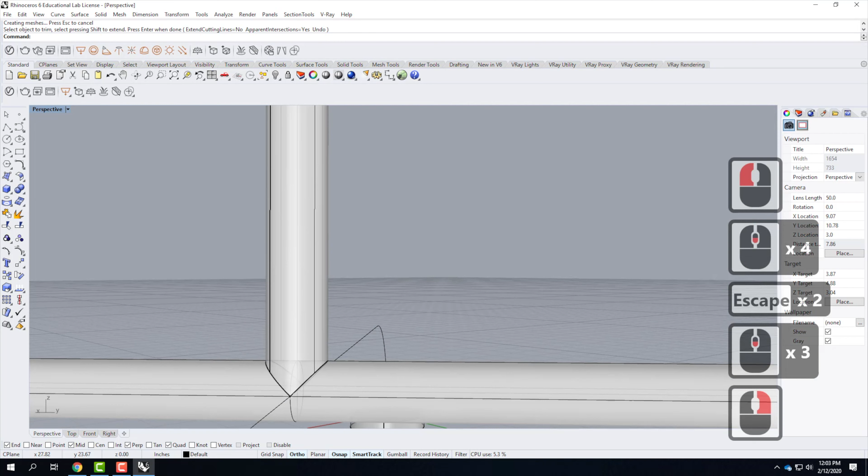So you can see how those two are intersecting right now. If I type show, I get the object back, and I could then fix it for this object. So let me hide. Now you can see it against this. I would need to do a little bit more trimming here. So I could say that's my cutting object, trim, and we could get rid of that piece and that piece. It doesn't really matter to trim it all the way as long as you've trimmed it off the bottom and you're not seeing it from the bottom.

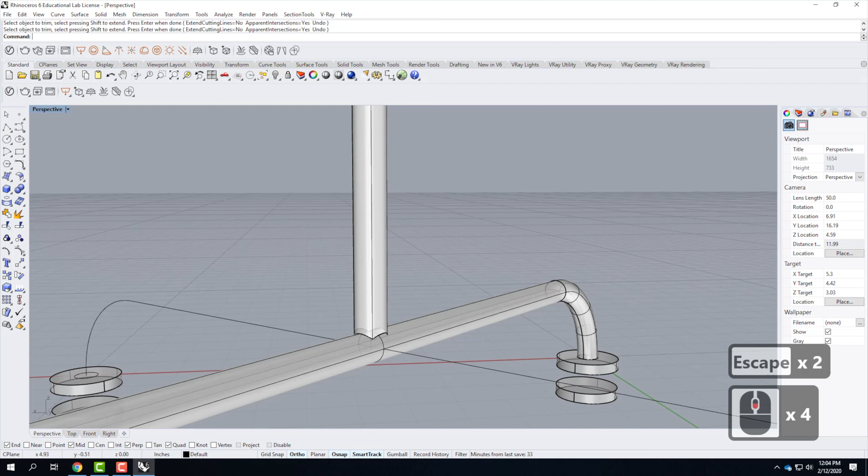Let me go back to show, and now I have those two pieces there all trimmed out and nice and neat. I could take it a step further and I could trim out these pieces as well, where those two intersect. That would be reasonable. So I could go into a trim, and I could say, okay, I want to get rid of that piece there, and I want to get rid of that piece there. And then I could use this and this as a trim for that piece and that piece.

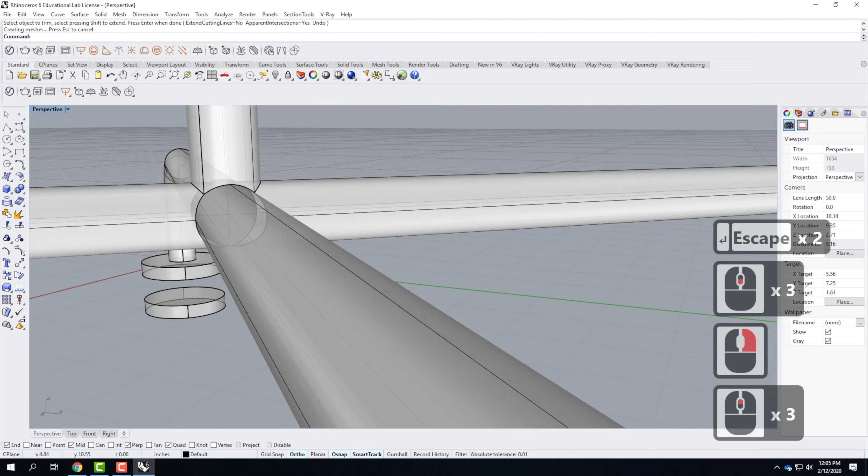Essentially, you get how I'm working through this. Again, those are all unnecessary, but it's not bad practice to learn how this trim process works. And essentially what we've ended up doing is we've made it so that there's nothing inside this. It's all hollow as they come together. Okay, so I've gone through and I've done that part of it. I don't need this curve anymore. That's pretty good. All right, I'd like for the center of this to fall right at 0, 0. Or the center of my glass to fall at the bottom of this point, one or the other.

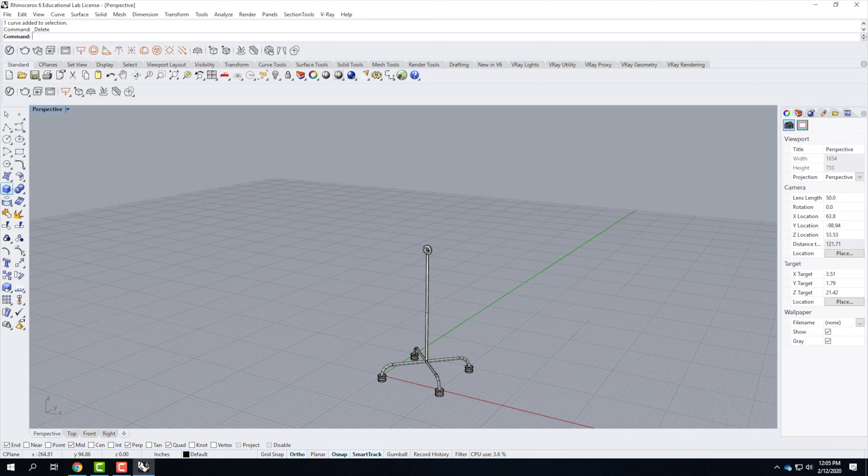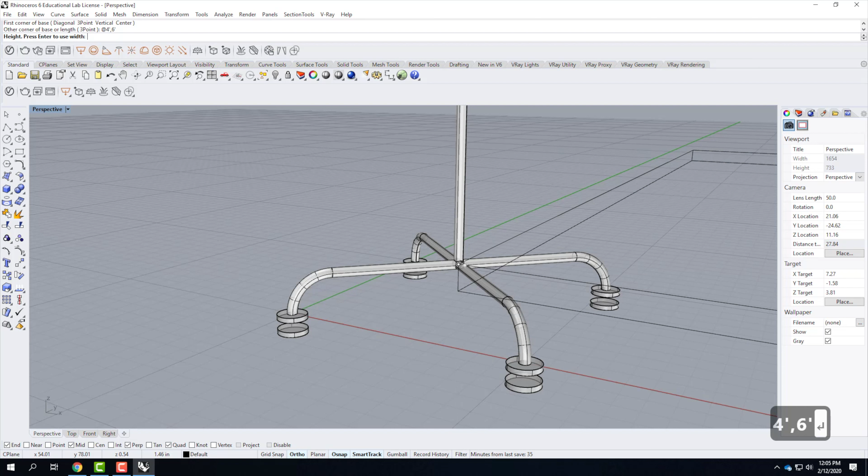So let's go ahead and create the piece of glass. I'm going to just use a box, corner to corner. And for the ease of snapping, I'll go ahead and snap right to the midpoint there. And so this piece of glass is going to be 4 feet by 6 feet. So I can go ahead and type in at relative coordinate here, 4 feet in the x, comma, 6 feet in the y. And my thickness is going to be a 1/2 inch, so 0.5. And I'll go ahead and press enter, and that gives me that pane of glass right there.

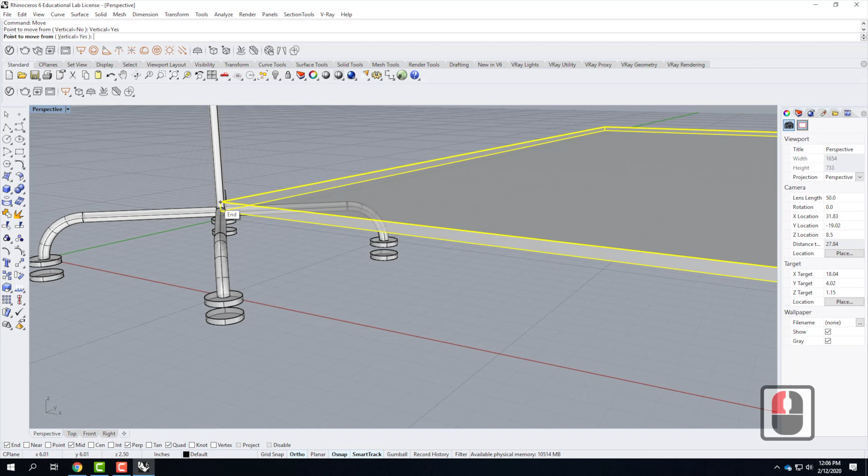This needs to be moved down so that it falls in the center of those little buttons. So I'm going to go ahead and type move, or go to transform and then move, and I will specify that this is a vertical move, which it is. And I want it to move down so that it references, and you can see me doing this here, right there, which means that the spider is going to fall exactly on either side of that glass. Okay, so that falls there.

That's nice. You can kind of see how this is going to work, because if I were to take this object and copy it and put it up here, I'd get another of that object, and they would tile together as I make a much larger wall. That's the idea here. So I'm going to go ahead with this object, and I'm going to add a little bit of steel cable going up here. So I'm going to do one more sweep.

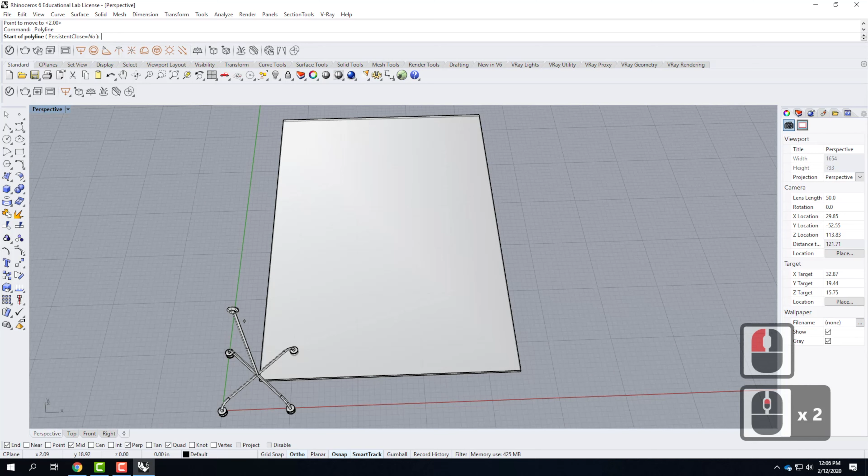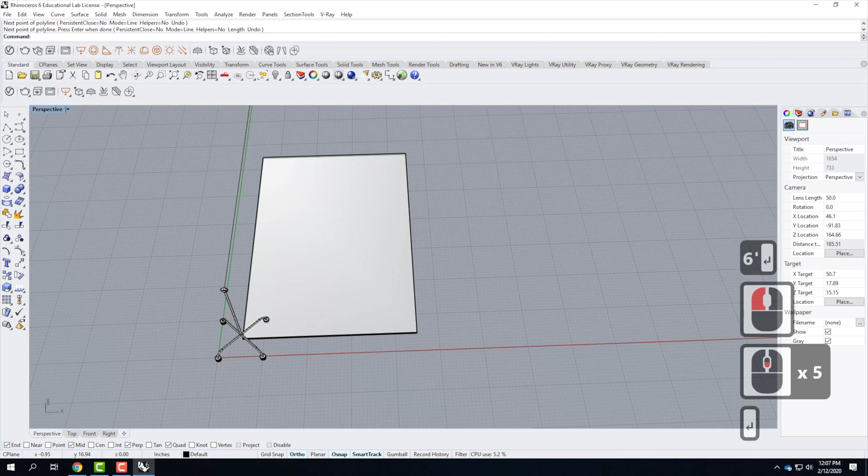I'm going to do a line right from the center. There it is. That's going to be at 6 feet so that it matches the height, oh, come on, of the glass, 6 feet in that direction. Press enter. I already have the little circle from when I created the donut or the torus, and I can do that using a sweep.

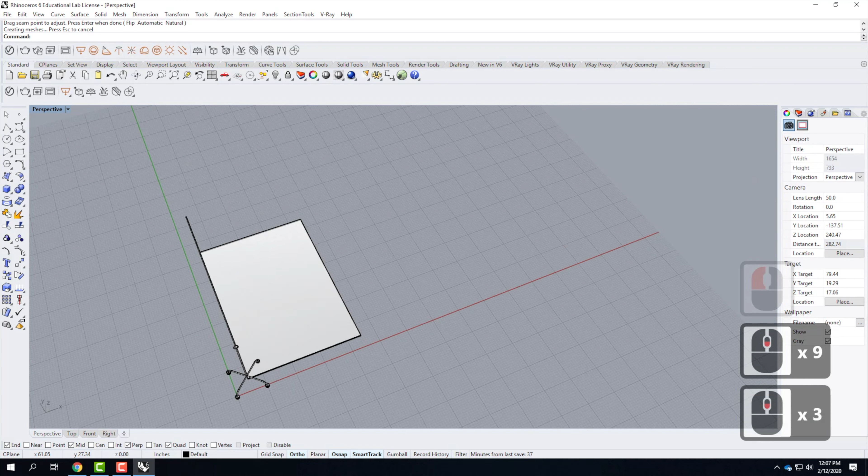So I'll do a sweep 1, my rail, followed by my cross-sectional curve right there. I'll press enter, and then one more enter, and OK. And I end up with that steel cable going up on the side here. So I've now made all the geometry that I need to make. The last thing I need to do is just kind of put it into view so that I can kind of see what it would look like, do a little rendering of it, etc. So